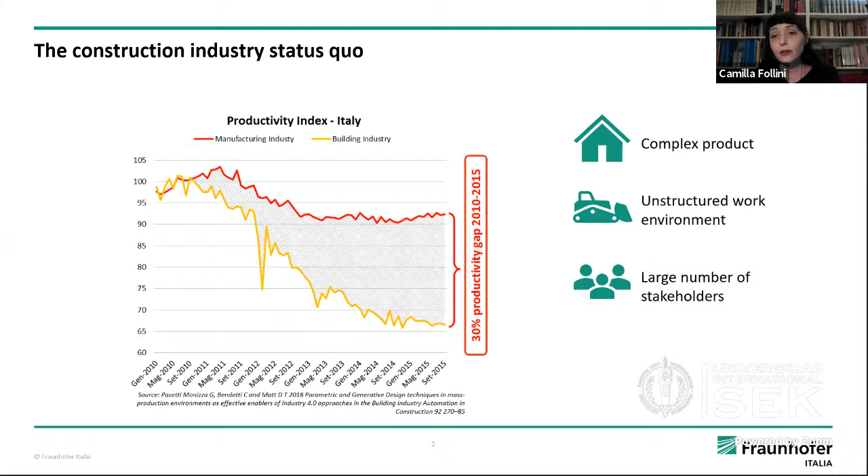Moreover, construction stakeholders are usually kind of skeptical towards new technologies and prefer to stick to conventional practices. Finally, if you consider integrating a robotic system into construction processes, you need to consider it would have to coexist or share its workspace with humans, meaning it would need very strong safety standards.

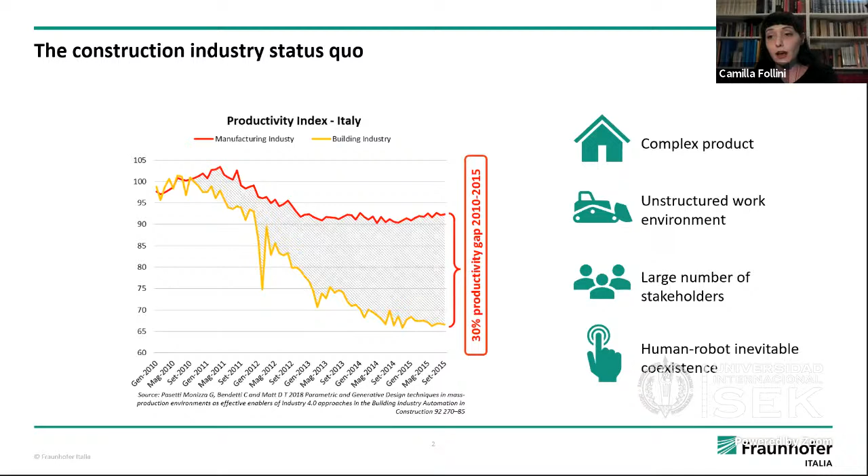However, advanced technologies and robotics could greatly help the construction industry, not only because construction is almost always among the top industries for accidents and injuries, but also because it is one of the riskiest industries for musculoskeletal disorders in the long run. That means workers need to do all the movements you see in this graph for construction tasks that put a strain on the body, causing them to retire early and have chronic pain even after retirement.

For this reason, construction is also losing attraction among younger generations, and especially in most developed countries, it is experiencing a shortage of workers. So automation in this case could greatly help relieve some of the strain that workers are going under.

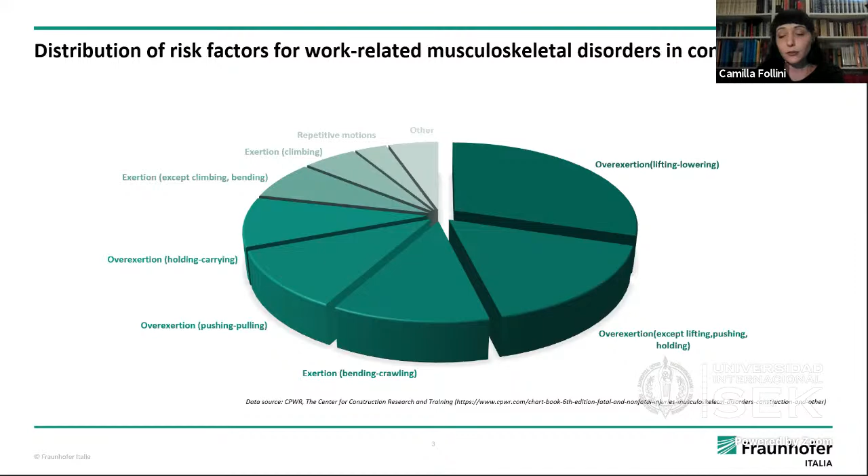However, at the same time, in recent years we could see some trends that could bridge these two worlds that are seemingly so apart from each other: the construction site and robotics.

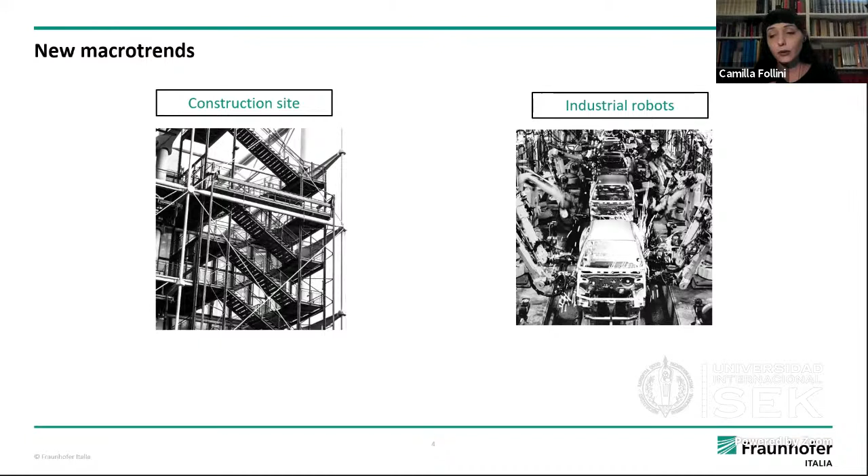On one hand, industrial robot manufacturers are striving to achieve more flexibility with their solutions, responding to a market need for more customization of goods. This means robotic solutions are no longer mass producing goods, but need to adjust to different products quickly. So there's a new trend, collaborative robotics or cobotics: robots that go outside their cages and work alongside humans to produce manufacturing goods together.

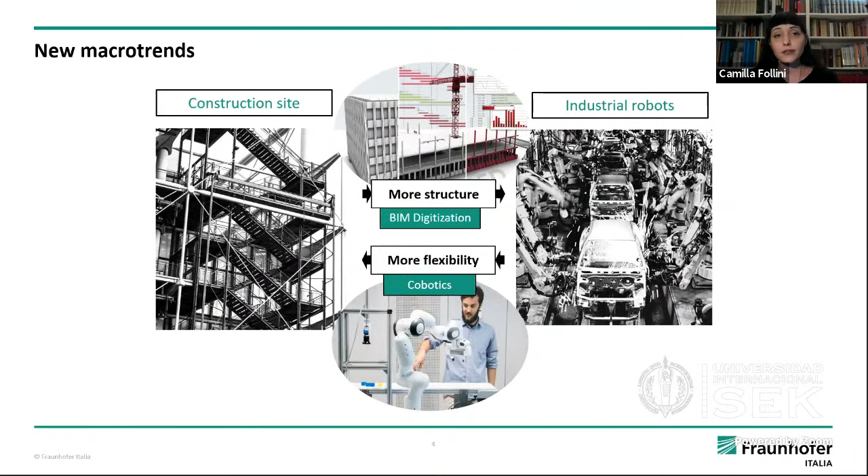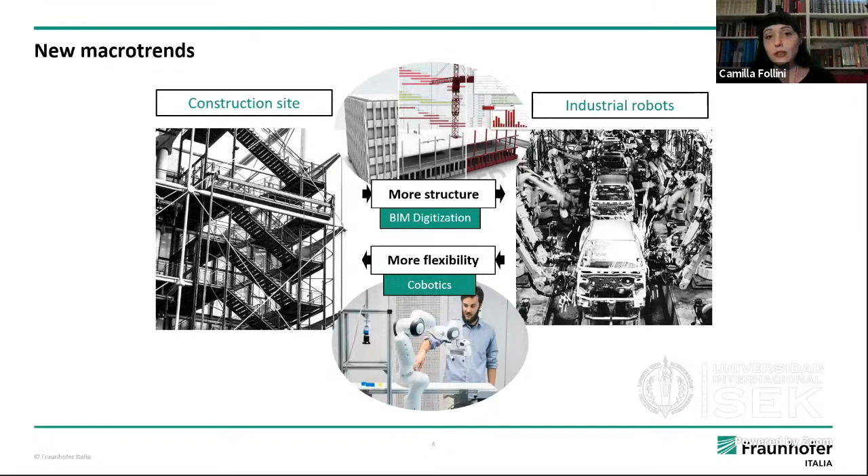On the other hand, from the construction side, we see an effort to achieve more structuring of construction processes. This is possible thanks to the increase of digitization in the industry generally, and a very large part of this is thanks to the new methodology of building information modeling.

BIM can be described as this new methodology based on digitization, aimed at collecting and organizing a very large amount of data on the building that can be used throughout its whole life cycle. With CAD we already had a first revolution, having a graphic image on a computer in 2D and 3D representing the geometry of the building and its components. With BIM, we have a larger amount of data, also object-based, always linked to a building object, which could be, for example, a wall, a window, or a door.

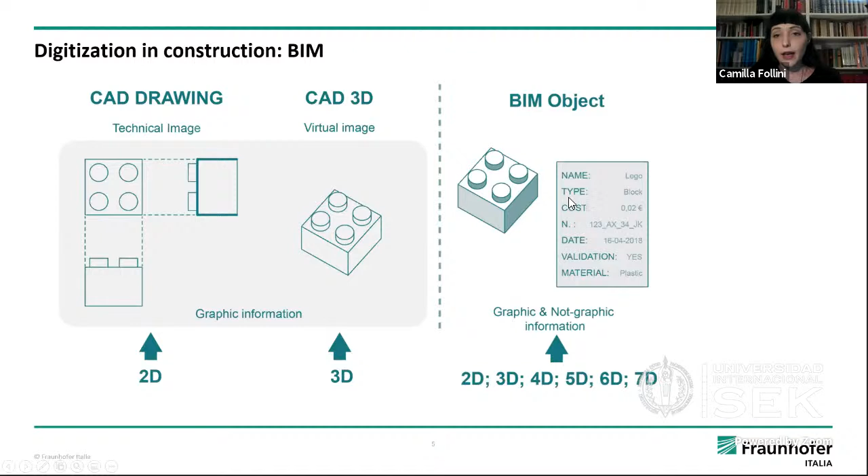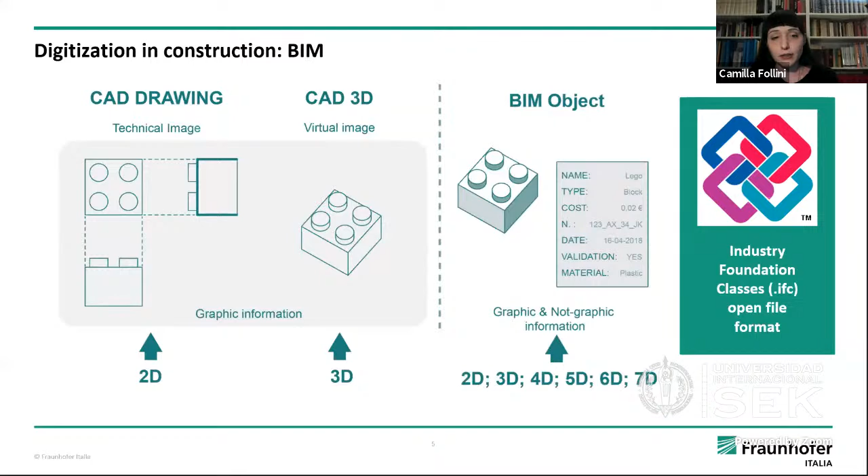These objects contain not only geometric information, but also different kinds of information that compose so-called dimensions. For example, if I have information on scheduling on site, on the construction date, then I would have 4D information. If I have information on cost, that's 5D BIM, and so on. Finally, all this data can be exported in this open format, the Industry Foundation Classes, IFC, which structures all this information meaningfully with the same structure.

This brings synergies with robotics because BIM strives to reduce communication errors between the different stakeholders of the construction industry, by bringing together information from all the actors at the beginning of the process, in some cases even as early as the design stage. It then provides detailed information on all the objects contained inside the building, structured always in the same way so it can be easily retrieved, with the data organized throughout the building life cycle.

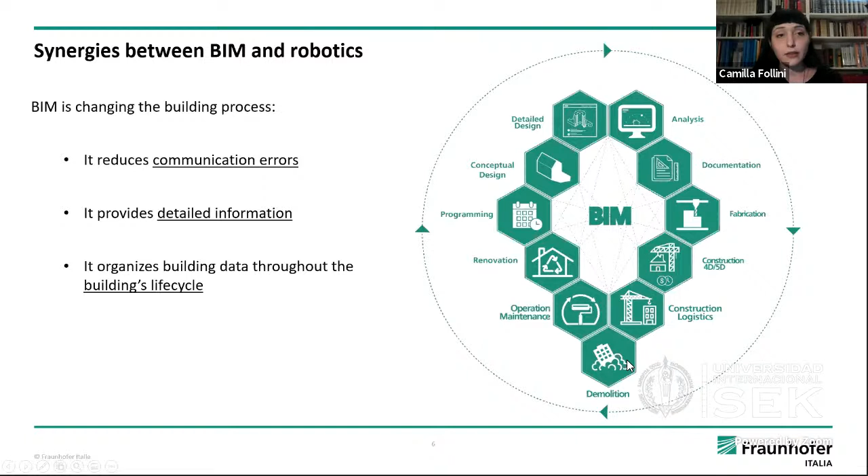So that means that from the design stage, I could use this information not only for construction, but also for operation and maintenance of the building, up until the demolition and end of life of the building. All of this, put together with the fact that BIM is constantly spreading in the construction industry and will soon become a standard, all of this...

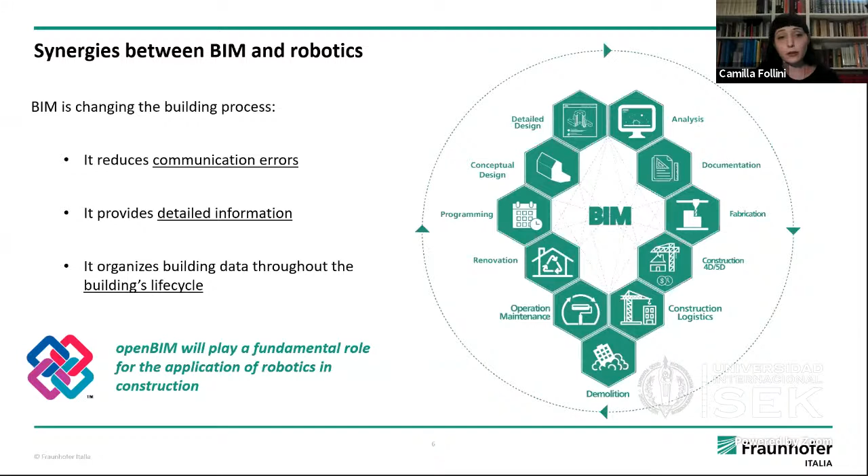concur to say that BIM, and especially Open BIM, will play a fundamental role for the application of robotics in construction. So the idea behind our project was to bridge Open BIM with another key player of open source, but on the robotics side, which is the Robot Operating System, ROS. ROS is supported by the Open Source Robotics Foundation, and it is used often in research for rapid prototyping. A strong advantage of this operating system is that it has a very large open source community of developers that share tutorials and projects.

This leads to a global teamwork of researchers working together to solve complex goals. Another advantage is that it has strong modularity, enabling the development of modules that can be integrated easily into different projects, so a solution studied by one researcher could be easily exploited by another researcher for another project.

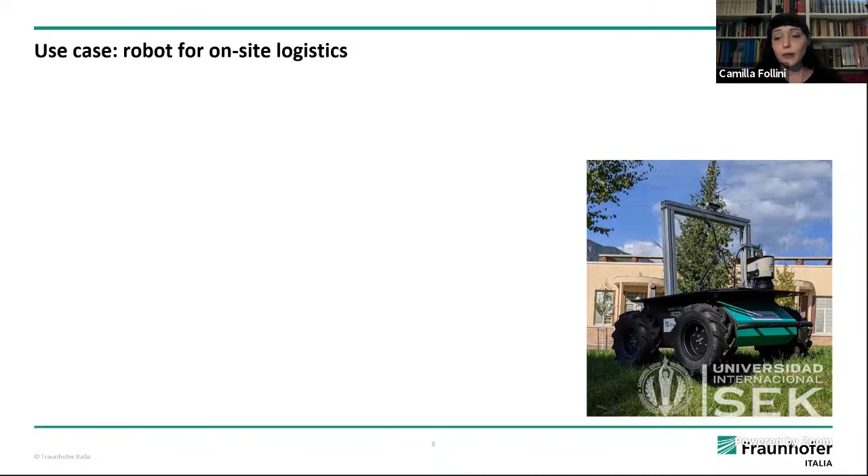In our research, we had the use case of developing a robotic assistant for on-site logistics that would follow an operator on the construction site while carrying heavy loads. A system like this would have obvious advantages, such as reduction of transportation times of materials and equipment, a task that brings no added value to the construction process overall, but needs to be done.

Then, of course, the reduction of fatigue for construction workers, bringing an improvement of their long-term health. And then an increase of productivity, since workers can focus on more important work that requires human intelligence and more quality.

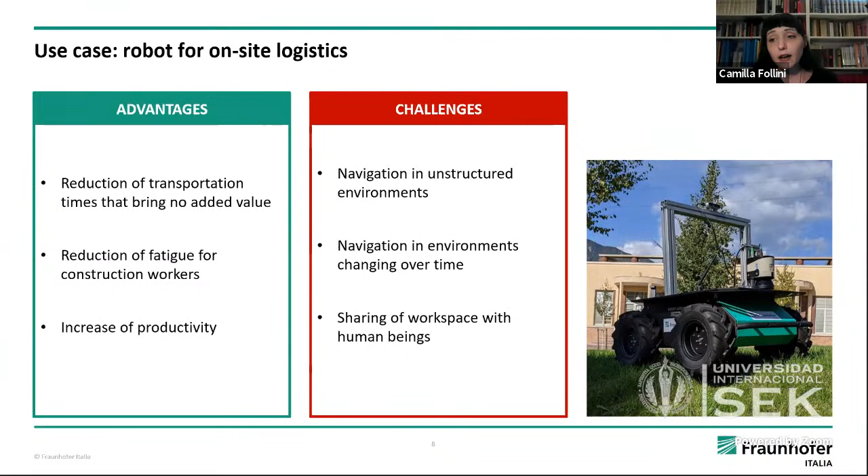However, it also has stronger challenges. It's a challenge because the robot would need to navigate in the unstructured environment of the construction site, and the environment constantly changes over time. It would also need to share its workplace with workers who usually have a low level of experience with robotic systems.

So to summarize our research objectives, we made this diagram. As you can see on the leftmost side, we have the Open BIM file, the IFC, which is used as a database to create a ground knowledge for the robot about the world.

This knowledge is based on an a priori knowledge of the BIM objects, studied in particular through their geometry, information on their scheduling on the construction site, and other kinds of semantic information retrieved by reading the IFC parameters and, for example, IFC types.

Then on the rightmost side, we have the real world, in which the robotic system is supposed to interact by supporting and collaborating with workers during construction and maintenance. And in the middle, we have this robotic system that is equipped with its own sensors to have an interface with the world.

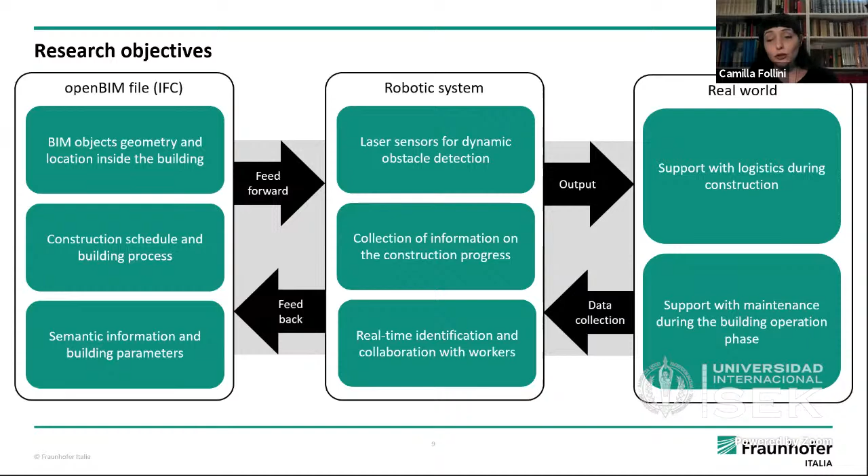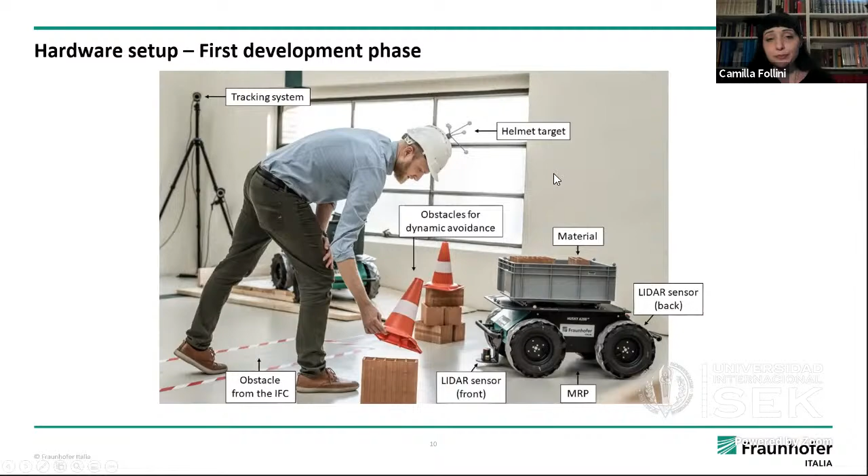In the second development phase, though, we wanted to overcome the most obvious shortcoming of the first system, which is the fact that it could work only indoors with this fixed tracking system. So in the second phase, we used only sensors that could be mounted on the platform itself. We kept one of the LiDAR sensors and added an RGBD camera mounted on the platform.

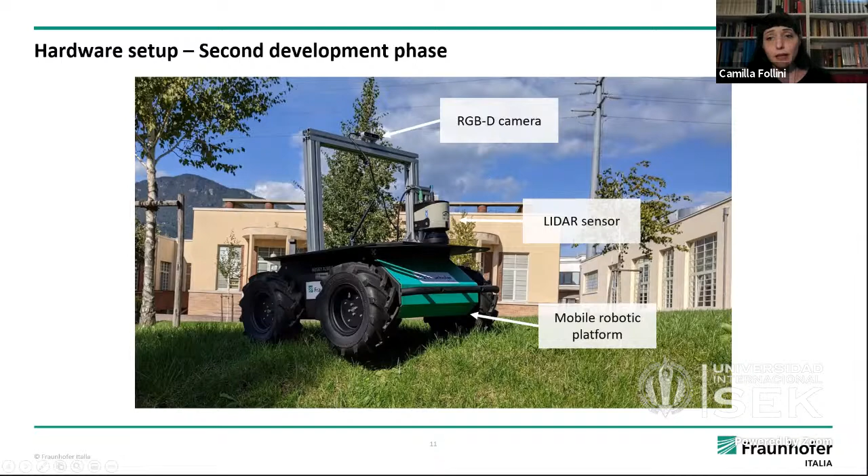About the transfer of knowledge from the BIM, we decided to focus on the open BIM file, so the IFC format. And we use this model, which is the model of our facilities in Bolzano, where the original lab with the fixed tracking system is located.

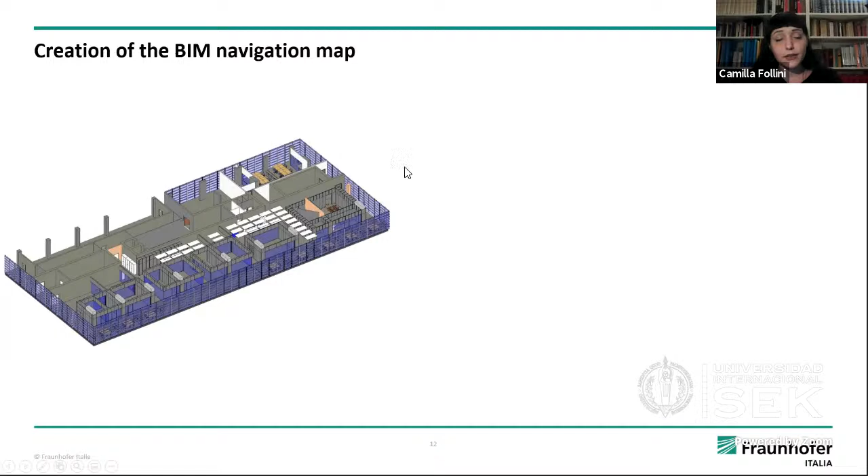And then we parse the IFC file to retrieve all the objects of the model, so the object together with its properties and geometry. Having this information, we would then create a map that could be read by the robotic system.

In this case, we wanted to create this grid map, which is composed of two kinds of pixels.

The black pixel represents an obstacle, and the white pixel represents a free space. And in the end, an outcome which is very similar to a regular floor map, however, with some differences.

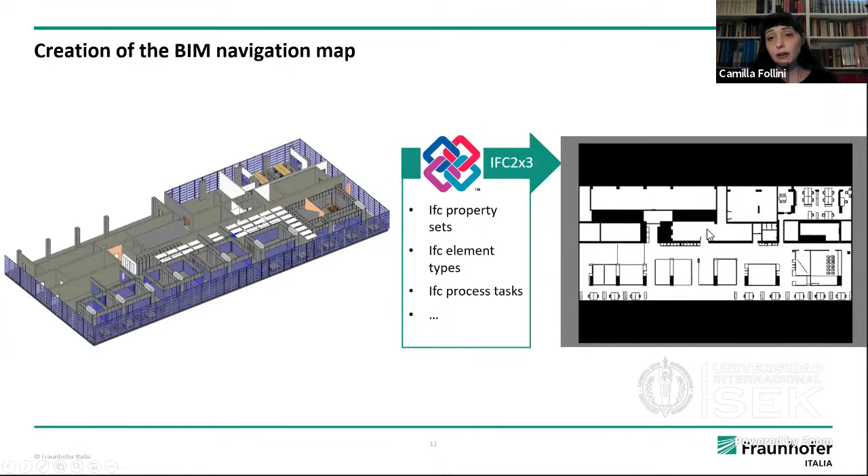We create these maps so that they are time dependent, based on the 4D BIM information. Other differences are that holes in the ground, such as the elevator shaft for instance, are obstacles as well. So to give you an idea of how elements are retrieved...

The semantical properties of the object are retrieved from the IFC file; we give two examples. The first is about a non-physical entity, which is an IFC space. They are used to name the rooms in the IFC.

In our algorithm, they're used to give semantic information to the robotic system, so which room is which. Other information they could give is also spaces in which the system should not go, is not allowed to go.

While for physical entities, the example of properties is more straightforward. For example, for entities that should be mounted, we could have properties such as the installation date, installation state, whether it is installed or not, and so on. So they are easier to imagine.

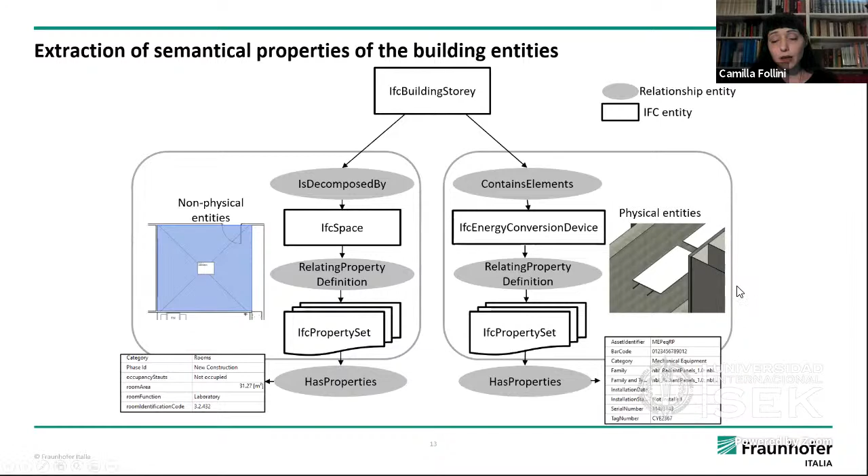About the time-dependent building maps, we start from this IFC file, and after retrieving all the objects, we go through this filtering, which is first geometric, so that we keep only the elements that have a risk of colliding with the robotic platform, just because of their shapes.

The second filtering is about the BIM, so the construction date, so that we keep only the elements that are meant to be built at the day in which the platform is used.

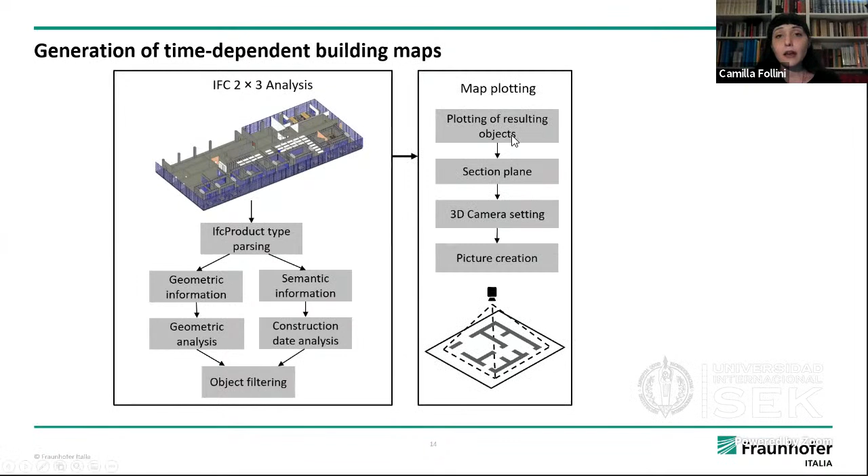So after this filtering, we keep in the code only the remaining objects, and of these we create this map, such as we would create a floor plan.

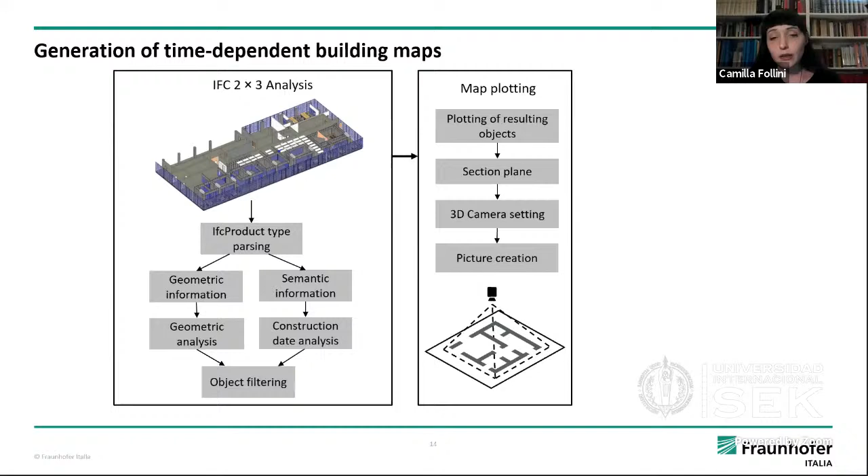So by creating a 2D plane and intersecting it with the 3D object, and plotting with a camera on top, in a top view, to create this picture. And to send it, we need to create an additional file, which is a YAML file that gives more information about this image, such as the origin and the scale, for example.

Then we send this YAML and picture to the map server, which is an existing node in ROS, and that sends this information to the navigation stack, to the global map, so that it is delivered to the robotic system this way.

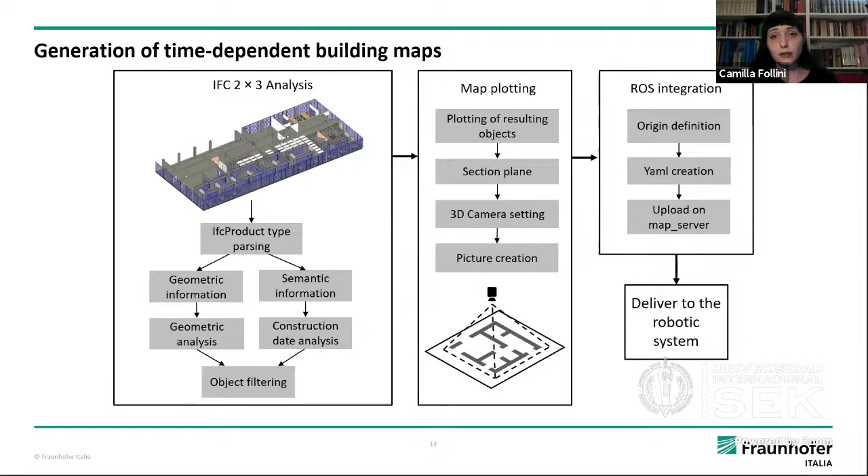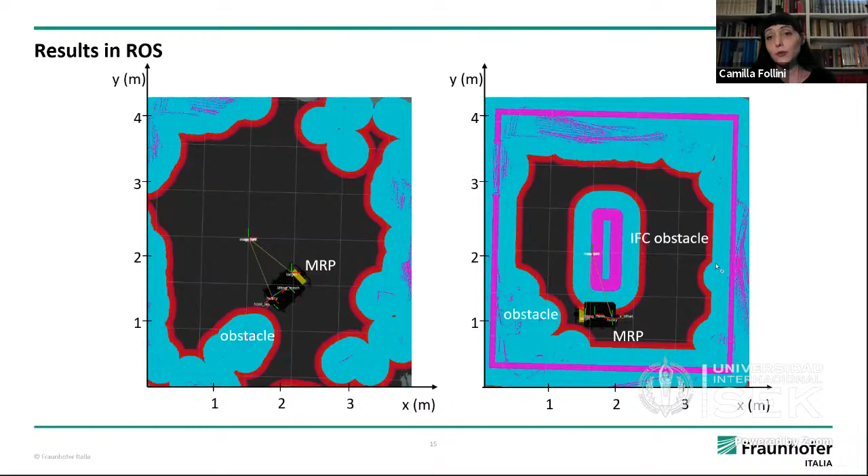And this is the result in ROS, from the first implementation. As you can see on the right, the BIM map is overlapped to the map that is created by the LiDAR sensors. And the robot in the lab was avoiding this obstacle in the middle of the room, which was strictly virtual.

For the second implementation step, we wanted to cover a larger area of our facilities. So you can see this is the floor in which this lab is located. We wanted to expand, but to keep the same elements.

So we have this temporary obstacle, which is here for a shorter amount of time, but it's not part of the building itself. We wanted to demonstrate that the a priori knowledge from the BIM could help the platform navigate.

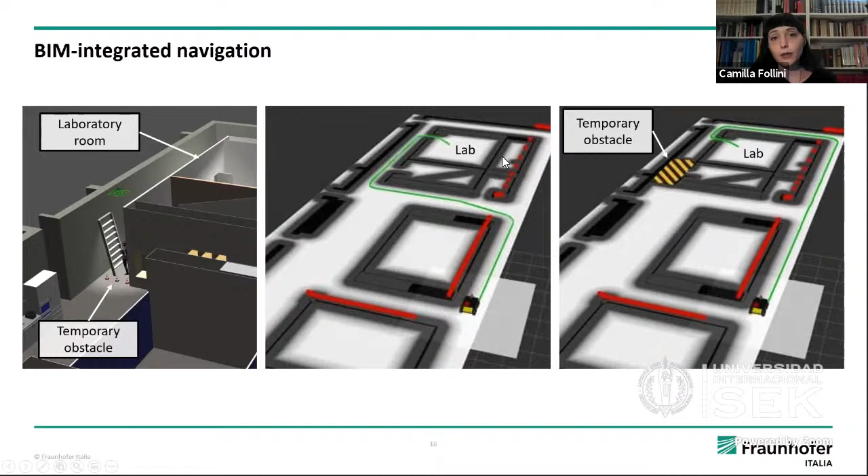The position of the laboratory is given through these IFC spaces, through the knowledge of the room. And this temporary obstacle is shown in the map given by the BIM, but not on the regular map of the building.

So in this case, an example of navigation that could be enhanced by the a priori knowledge of the BIM is this: if I have this goal in the map and I start from this point, for example, the regular navigation stack would calculate the shortest path that is passing through this corridor, without knowing that there is an obstacle in this point.

So the robot would reach this point and then start to replan its route and start to go to the lowermost corridor.

However, with the a priori knowledge of the BIM, the platform would calculate from the beginning that since there is an obstacle here, the shortest path is the one going in this direction, so that it will save lots of time. And that is the experiment we made.

So we have this fixed goal point, and then we randomized the starting point of the platform, and we repeated this 4,500 times per map, for a total of 9,000 times, so with and without BIM.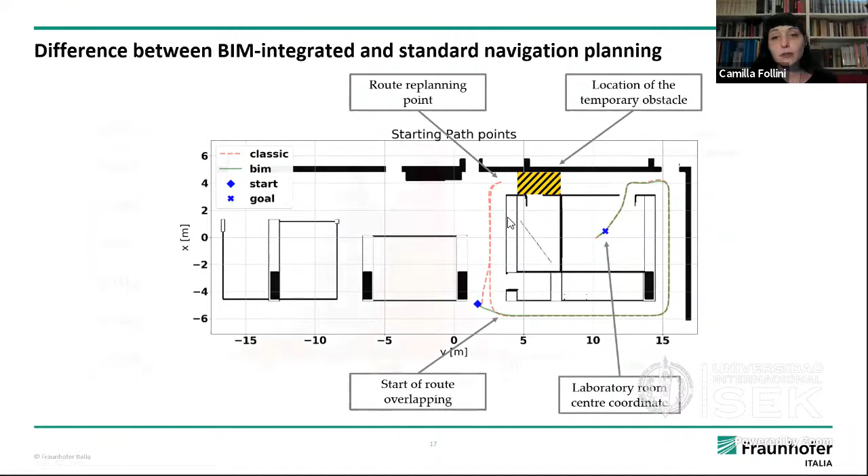However, the BIM knowledge could save a lot of time if the system was starting in the lower part of the map. In that case, it will need to do replanning, reach some point in the upper part of the map, and then replan its route.

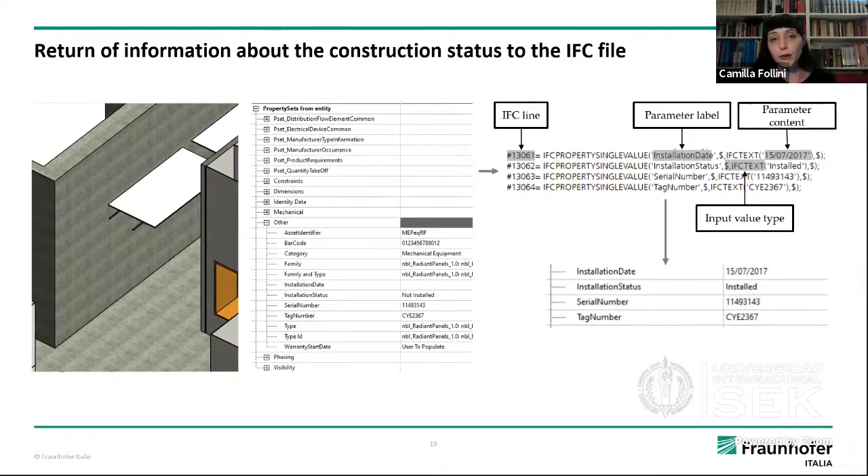And finally, we integrated a way to collaboratively send information from the robot back to the BIM. In our use case, we consider that an operator would input that the installation of an element was performed, and in our interface we implemented a way to simply rewrite the nominal value of the IFC parameters, just to have a very quick return of information to the BIM file.

So our project is still ongoing. Till now, what we've achieved is that we interfaced BIM with the robot operating system, so that we can retrieve from the BIM these metric grid maps and metadata for navigation that is more semantic. We also implemented a follow-me feature, so you could follow the operator in the laboratory and outdoors, and automated obstacle avoidance for any obstacle not foreseen in the BIM file.

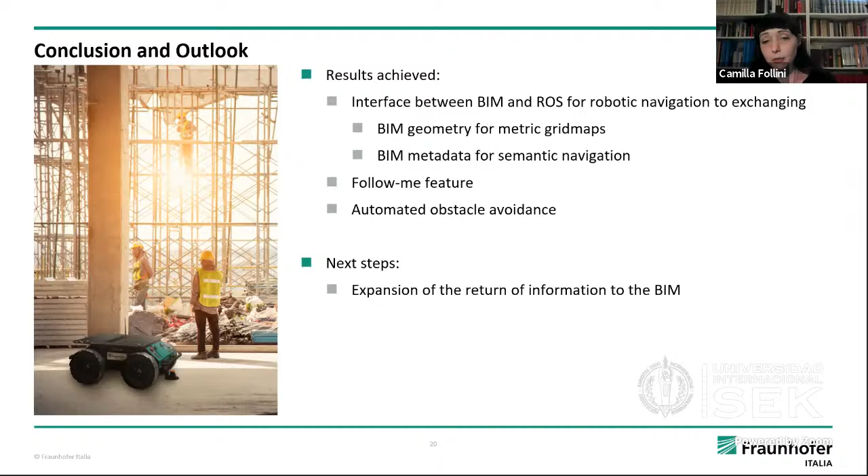For the next steps, we plan to expand the return of information to the BIM, which for now is very basic. We also wish to implement a way to get information from the point cloud retrieved by the LiDAR sensor, and compare it with the IFC model. Then we plan to apply the system not only in construction and maintenance, but also during the operational phase of the building, for facility management. Finally, we plan to do some testing on a real construction site.

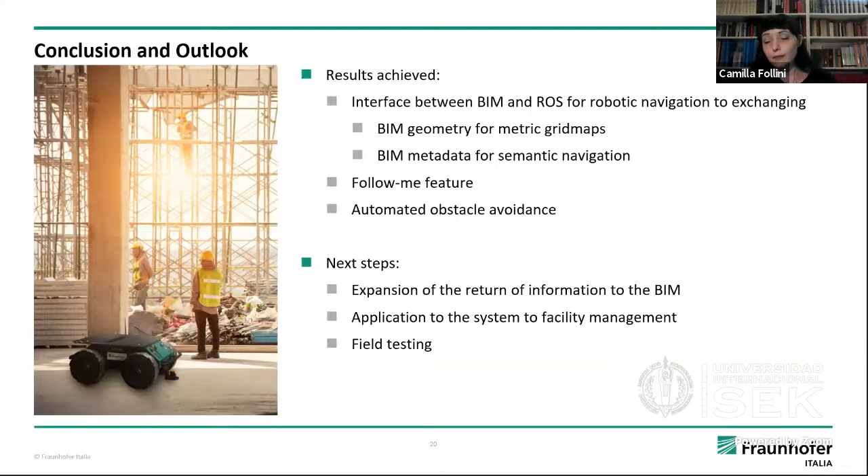So thank you for your attention, and by all means, if you have questions, I would like to answer them.